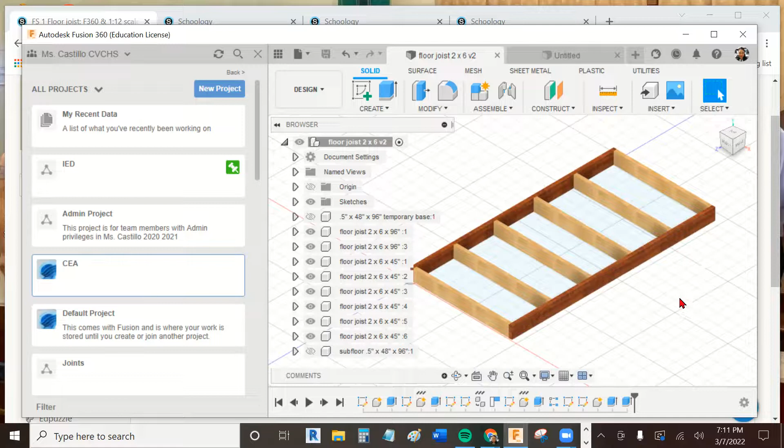With the title block, okay. So if you haven't already, go ahead and click on new project and create a new project, rename it CEA, and then double click on it. Then inside this new project, go ahead and create a new folder, and rename it Food Shack.

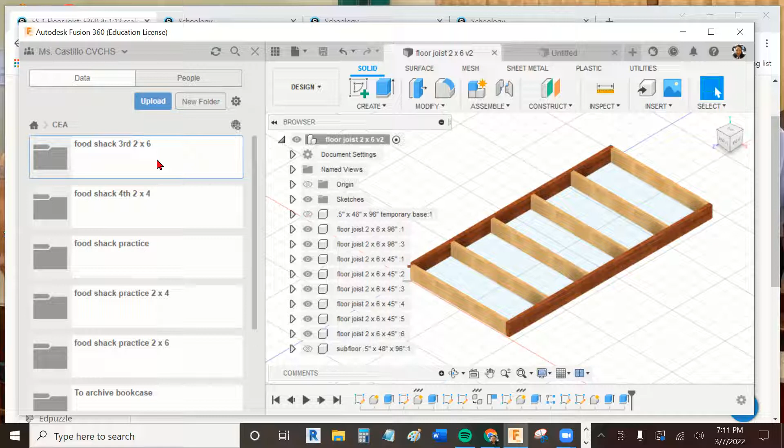Now for third period, you're going to be 2x6. Fourth period, we're going to do 2x4. But in any case, double click in the folder, name it Food Shack folder. Okay, this one is for third period. So you should have an untitled file like this.

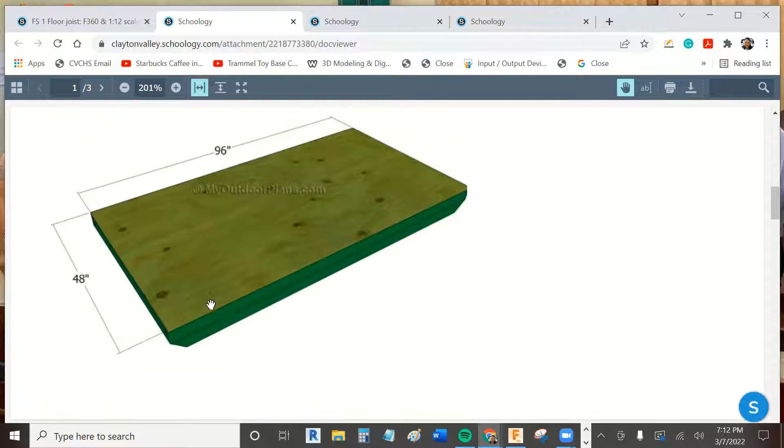So in one of the handouts, we're going to go ahead and start with the floor joist, which is this one right here. It's going to be 48 by 96. And instead of 1, 2, 3, 4, 5, 6, 7 of these horizontal components, we're going to do 6. So it's going to be just a little bit different.

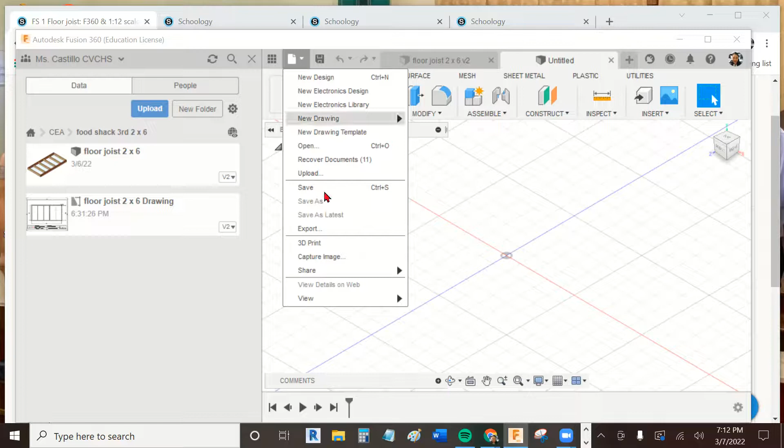Okay, go ahead, open up Fusion, and I'm going to go ahead and name this file. Go ahead and name your file floor joist. I'm going to name this third period 2x6.

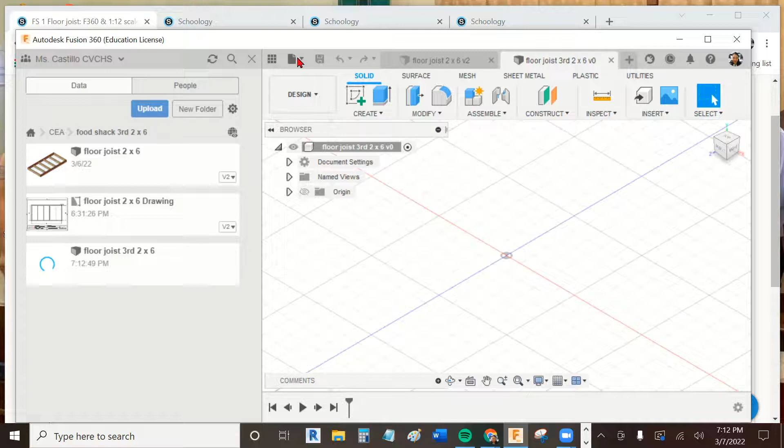Okay, so again, we're going to be looking at this as a reference, 48 by 96. So what I'm going to do on Fusion 360 is close this data panel so you can see we have more room here.

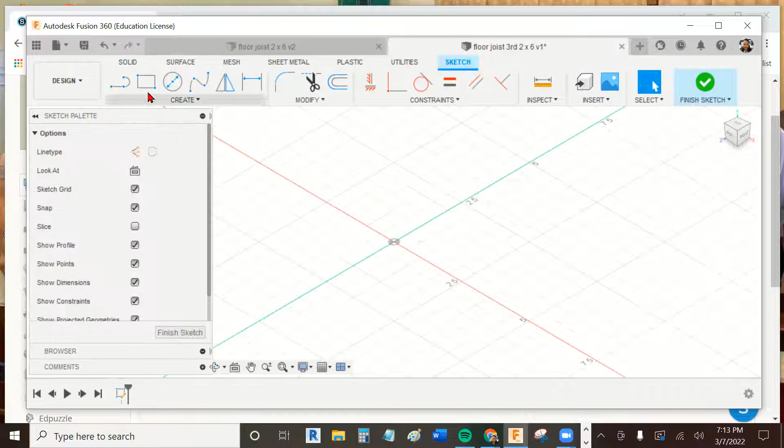I'm going to click on new sketch, click on the bottom plane, click on 2-point rectangle. And again, I always start at the origin and then go out. 96 inches, hit the tab button, and 48. So that's my sketch there. I'm going to click on finish sketch. Okay, zooming in.

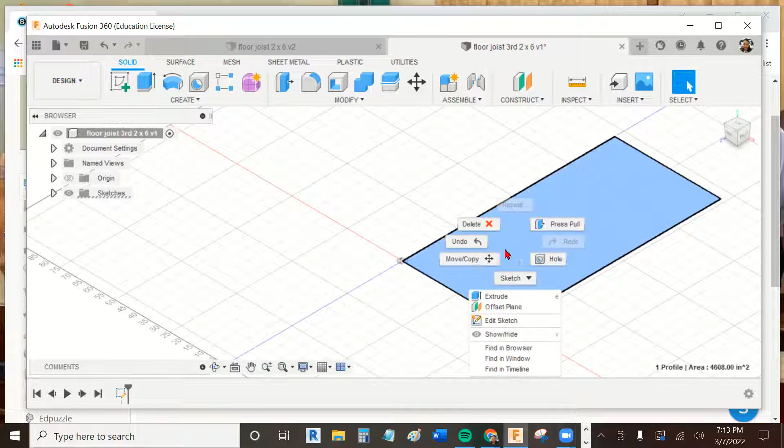And then I'm going to right click inside the sketch and click on extrude. I'm going to go up. This is going to be 0.5 inches.

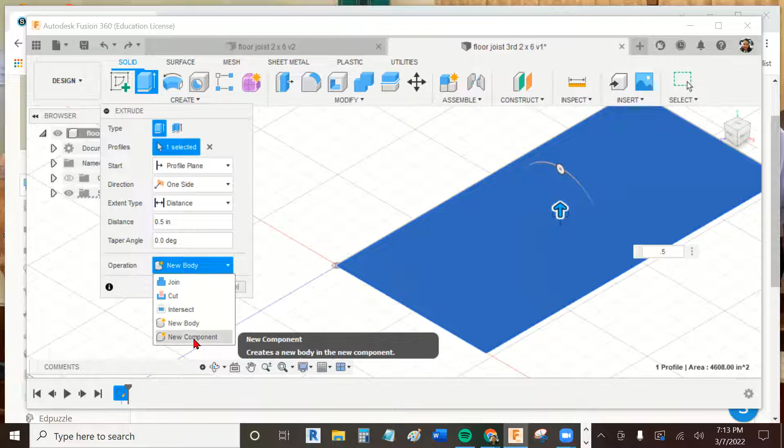Okay, so now let me do that again. With a sketch, I forgot to show you, in the sketch I right click, extrude, and make this 0.5 inches. But before I hit OK, I'm going to make sure that the operation is new component. See how I have join, cut, intersect, new body -- we're going to hit new component because this is going to be our first new component. So I should have component 1 right here.

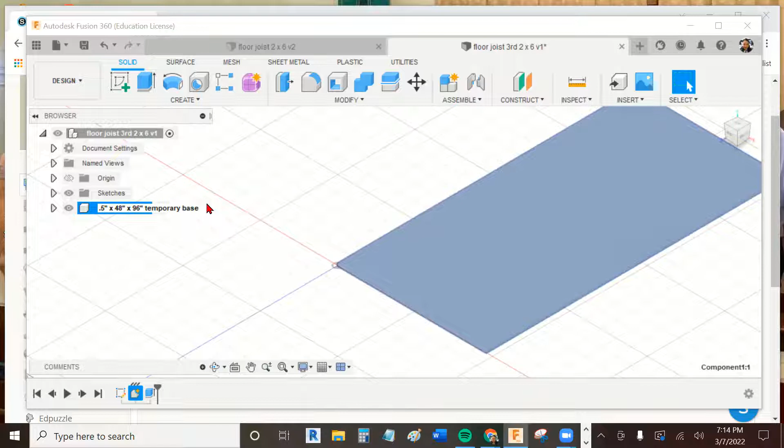So I'm going to double click inside, and go ahead and name this 0.5 inches by 48 inches by 96 inches. And I'm going to go ahead and name this temporary base, just so we can have something to start, because this isn't really part of the floor joist, just so we have something to draw against. So that's our first component.

Now we're going to make it smaller. So now we're going to draw on this 48 by 96. We're going to draw this first right here -- the 2 floor joist sides, the 96 inches and 96 inches, just like that. So here I'm going to click on the front plane.

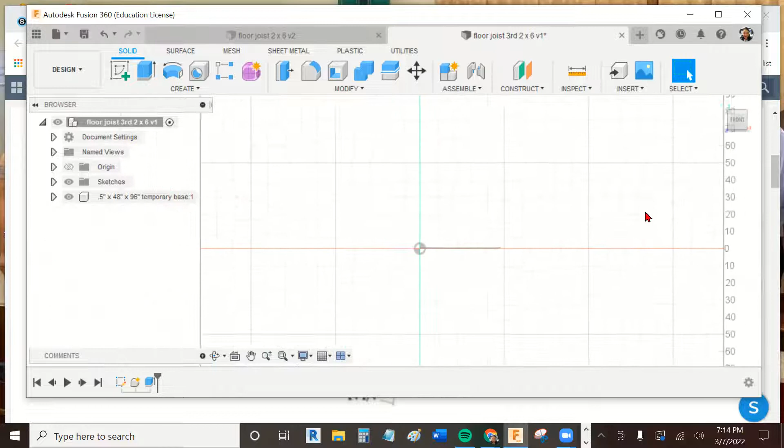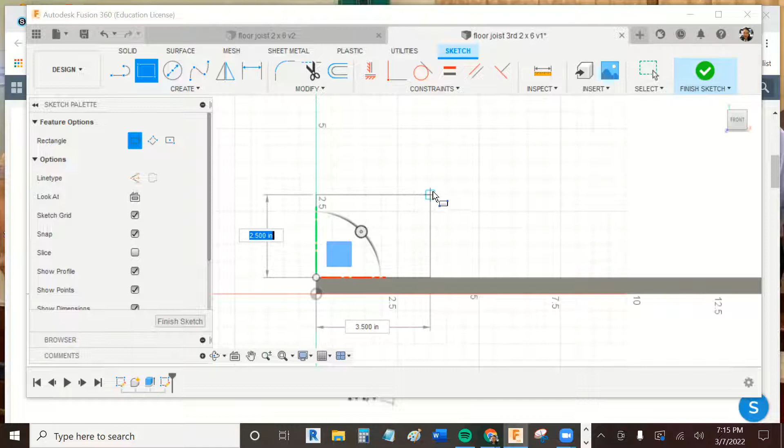And I'm going to zoom right in because I want to make sure I get the corner correctly. So I'm going to click on create sketch, click on that plane, great. Click on 2-point rectangle and then zoom in, right, make sure I got this corner. I want this corner, inside corner right there. Then I'm going to go diagonal. Since we're using 2x6 boards, 2x6 is really 1.5 by 5.5.

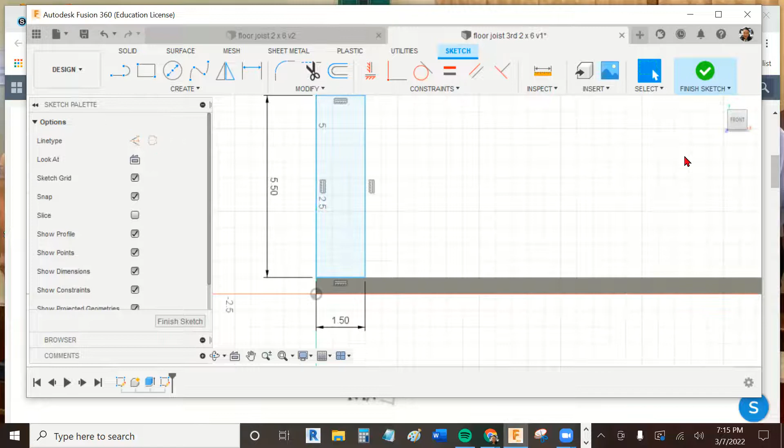So here for the length, we're going to type in 5.5 by 1.5, okay, see that? Then I'm going to hit finish sketch, click on the home button, and then we're going to extrude out all the way out to 96 inches.

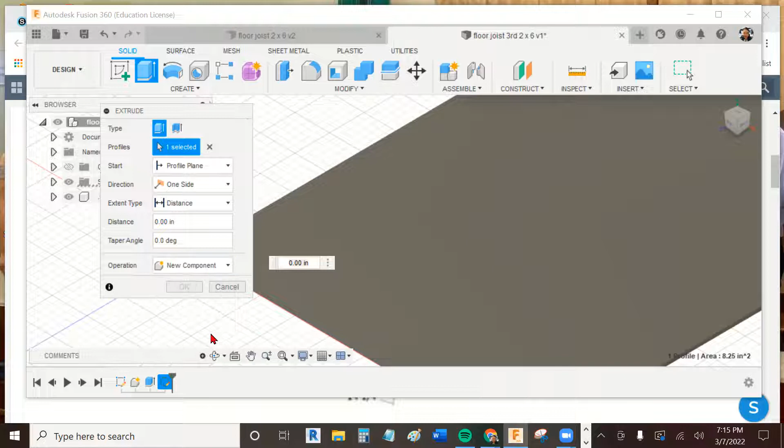So I'm going to right click inside the sketch, and then click on extrude. And then again, make sure you change the operation to new component, and then which direction we're going -- so we're going this way, so that's going to be negative 96. Remember, operation new component, hit OK.

Okay, just like that. Let's see how that looks from the top. Okay, perfect, see how it matches? I just want to make sure that it's exactly 96 inches. From here it kind of didn't look like it.

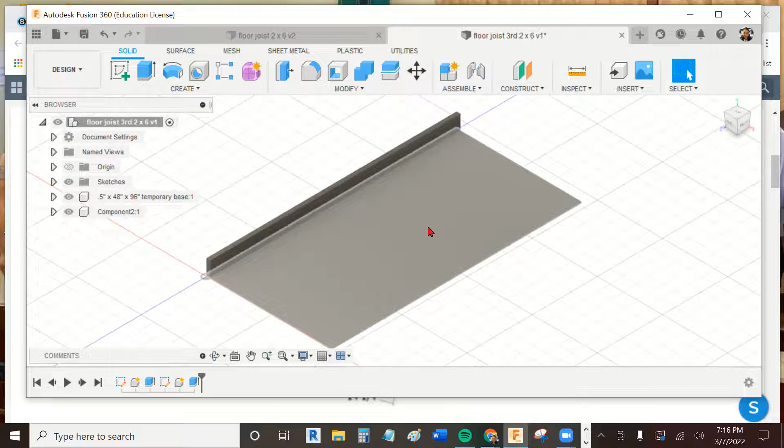So I'm going to click on this component, double click. I'm going to go ahead and change the name again as we go. So this is going to be a 2x6, okay, which is the actual -- I'm not going to put the quotation marks because it really isn't 2x6. So I'm going to put 2x6 by 96 inches, and I'm going to name this floor joist.

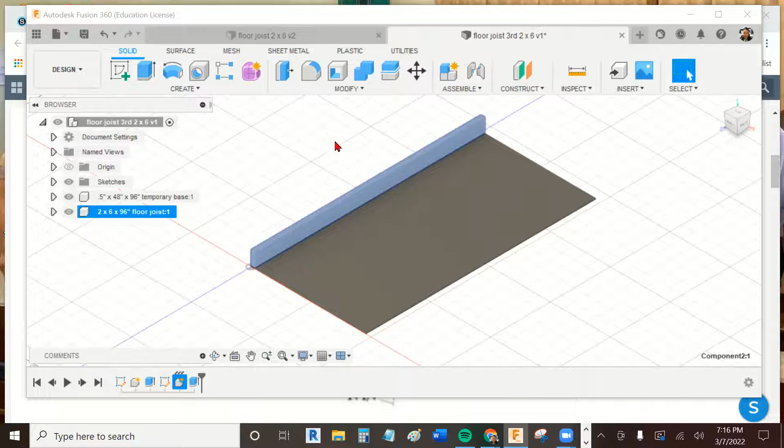It's like that, okay, enter. Now before I continue, I'm going to click on modify. I have this highlighted, click on modify. I'm just going to change the physical material so we can see the contrast in colors, and you'll understand in a second. I'm going to pick cherry right there.

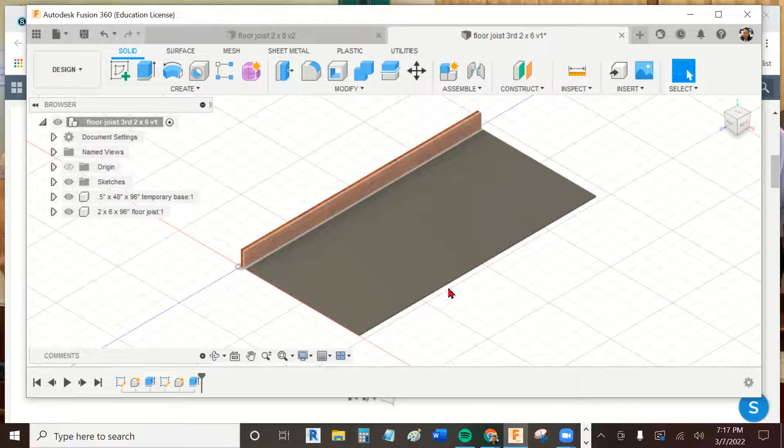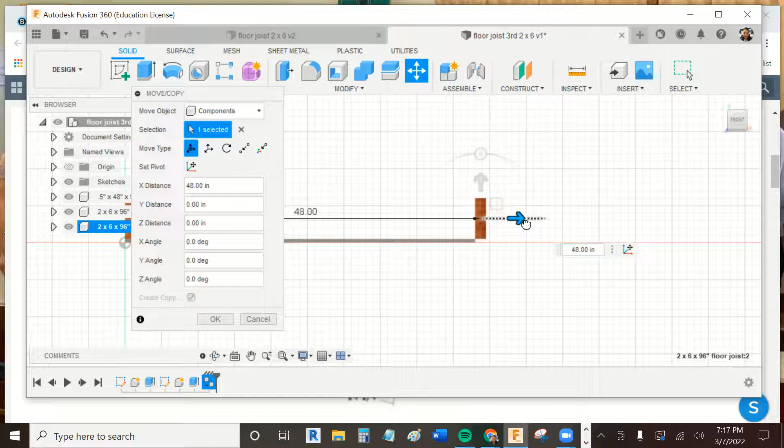Now I'm going to use the move copy tool to create the right side of joist here. Click on this floor joist, click the move copy icon, check create copy, then grab the arrow. Let me move this over, making sure it goes exactly on that corner. If I go this way, 48 is too far, 46 is not far enough. Let's see what 47 looks like. 47 is too far. I think it's 46.5 - there you go, 46.5, hit enter, okay.

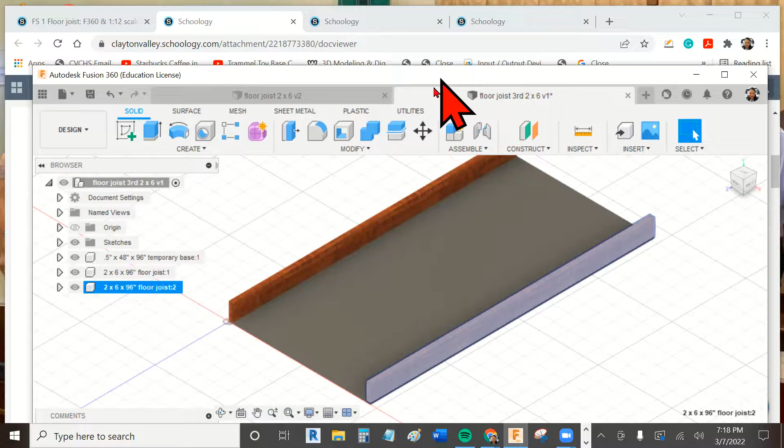So now I have my two 96-inch panels for the floor joist, okay. Now we're going to add, we did the horizontal panels, now we're going to do the vertical ones here, okay.

On here, I'm going to click on the front again. Oh, looked like it was too far over. So I'm going to place it right here, right on the inside corner, this whole length, which I believe is about 45 inches, okay. So I'm going to go create, sketch, okay.

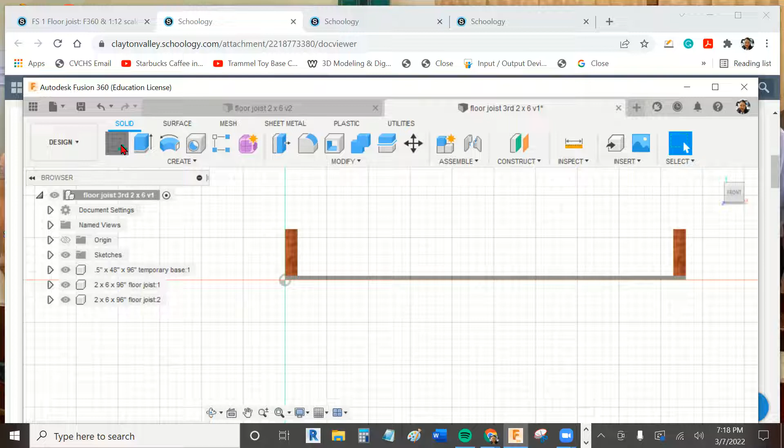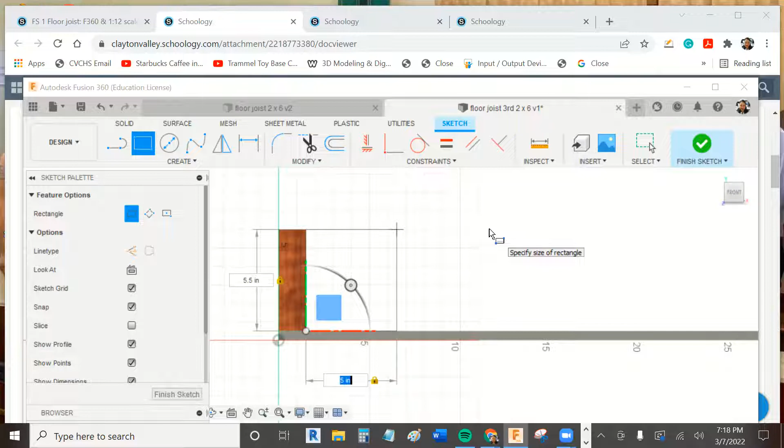Click on this plane, okay, and then I'm going to click on 2-point rectangle. Again, zooming in because I want this inside corner. Then I'm going to go up the same distance, which should be - I'm going to hit tab - 5.5 up here and over here. Zoom in, click, okay.

So I want this distance to be 45. Is that right? 46, okay, 46 is too big. See that 46 is too big? So I believe it's 45 inches. Okay, hit finish sketch. Here's a home view.

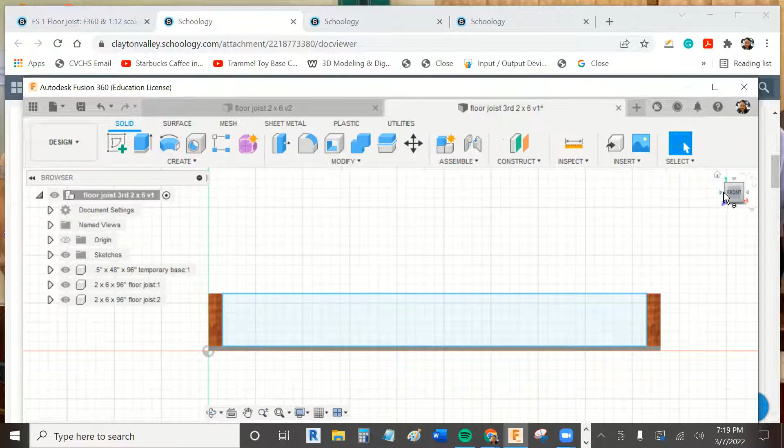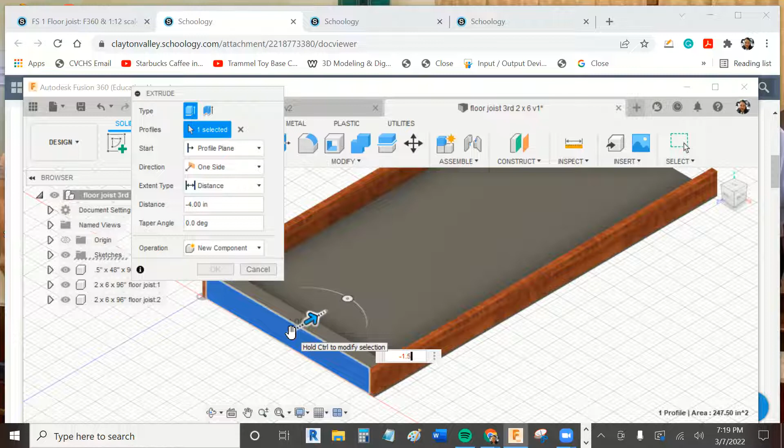Now I'm going to extrude that 1.5 inches. I'm going to left click on here, then right click, extrude. And again, make sure that you click new component as the operation, because we're going to go this way. So if I'm going this way, it's going to be negative 1.5. Okay, see that? So we have the one short joist over here.

Okay, so I'm going to go ahead. All right, I'm going to rename this 2x6 by 45 inches, still the floor joist.

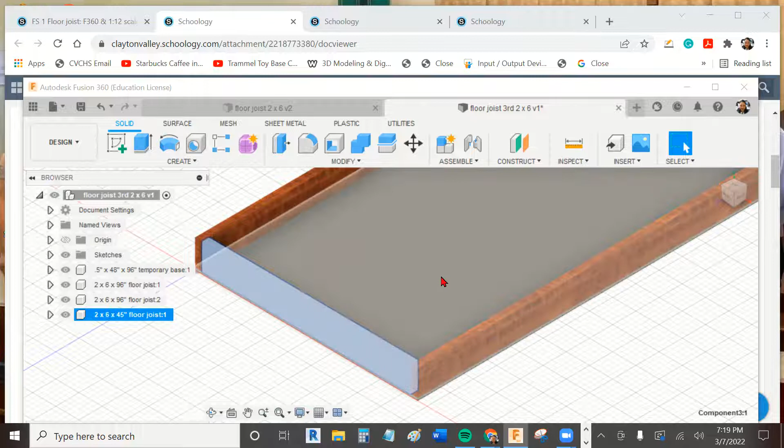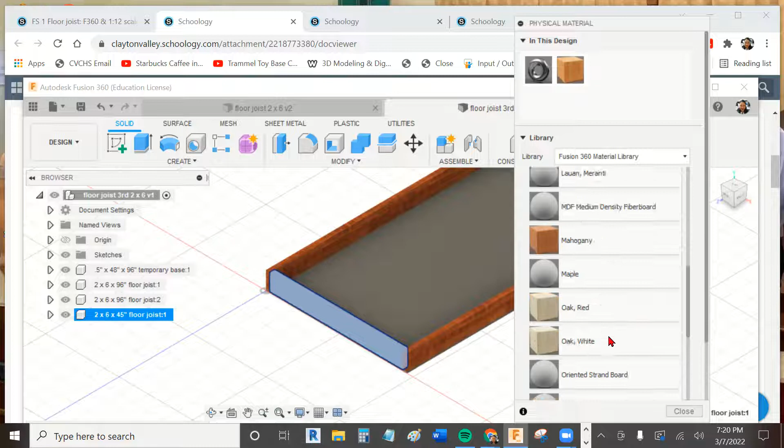Okay, so now we're going to add 5 more copies of this, but this time instead of using the move copy tool, I'm going to use the pattern tool. But wait, let me click on here again - I'm going to change the physical properties and make it pine. So I'm going to modify, click on physical materials, and let's make this pine. It's a little bit lighter, so that way you can see the contrast and colors.

All right, if I click on the home, the front tab, I want to make sure that it lines up correctly, that it doesn't go too far or there's no gaps, right? If I zoom in all the way, there's no gaps here, right? Okay.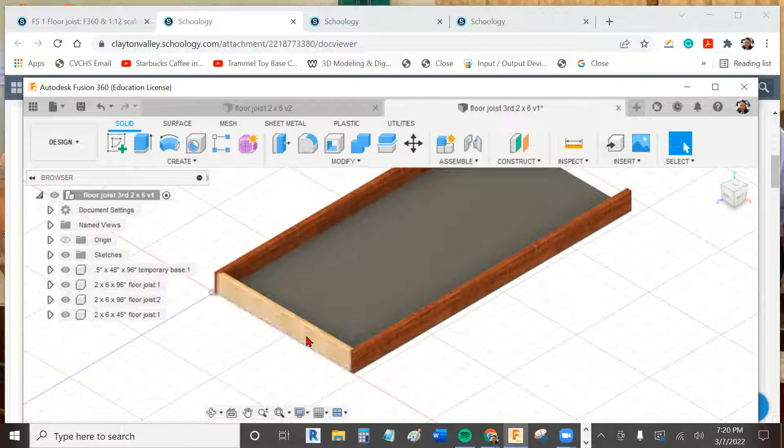Okay, so now I'm going to add 5 more of these boards, 45-inch boards all the way across. This time I'm going to create - I'm going to click on pattern, rectangular pattern, just like we did with the bookcase. I'm going to click on suppress, and then make sure you click on components. It's asking what object you want to select - I'm going to select this object.

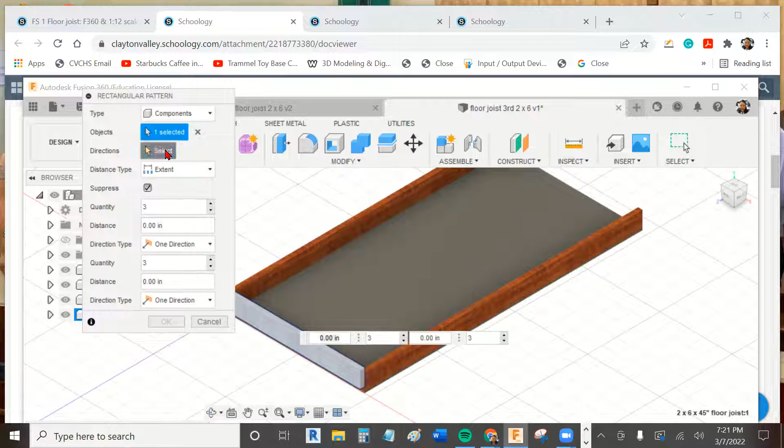Which direction do you want to go? I'm going to go this direction. And then how many do I want? We're going to do 6, right, so I'm going to type in 6, and then click this arrow, and I should have 5 more show up, right?

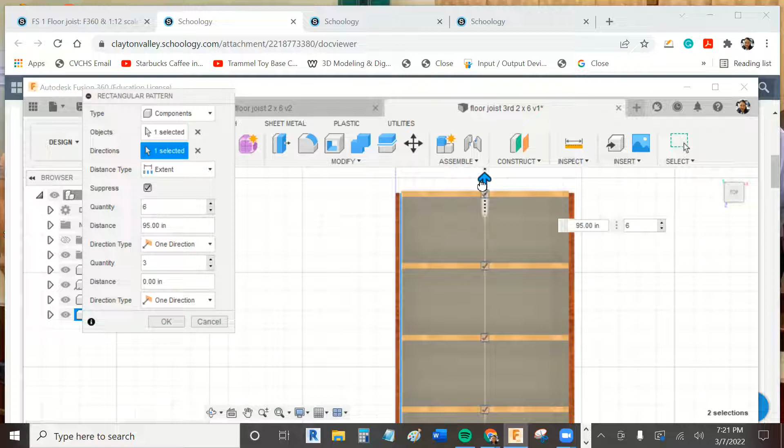So let's go up here, let me click on the top view. I want to make sure - if I go here, 95 is too far. See how 95 is just a little too far? I believe it's 94.5 - there you go, 94.5. Hit okay, all right.

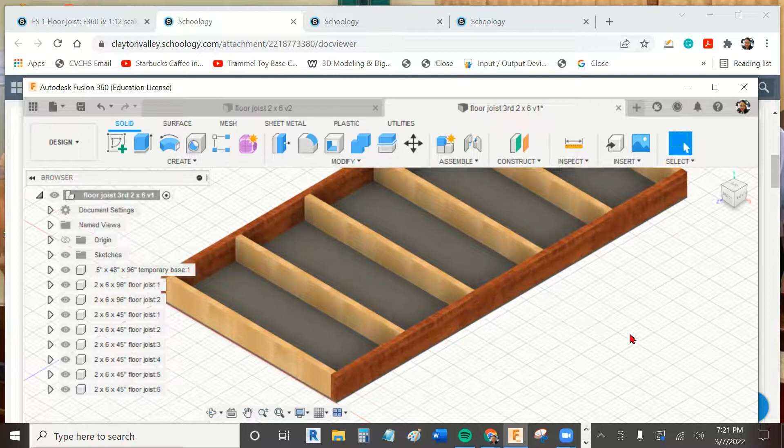So that's our floor joist, okay. See that? So if you look at it, it should be flush on every side - you shouldn't see anything sticking out. If you look, this is our temporary base, okay, it should look nice and even on all sides.

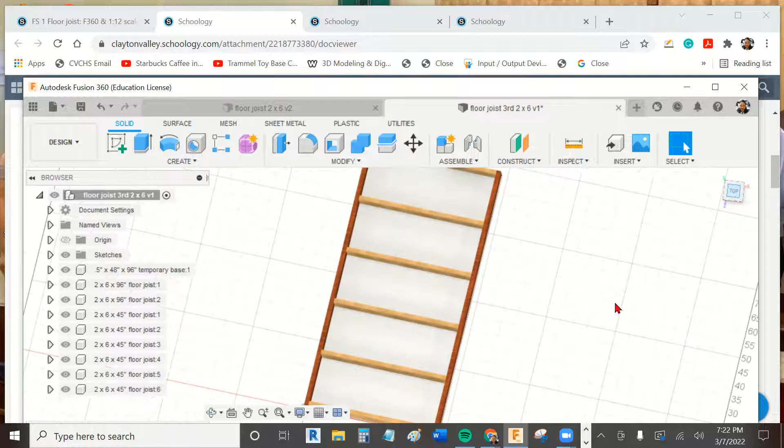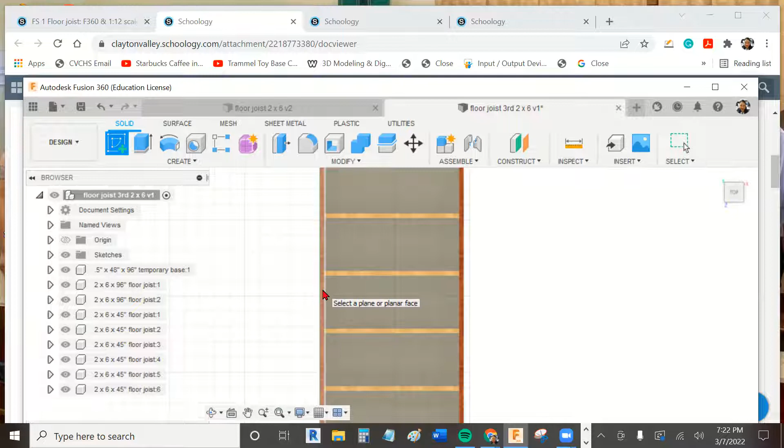Now we can do the drawing now, let's go ahead and do the subfloor, because there's going to be a floor that goes on top of this, okay. So I'm going to click on the top view, and I'm going to go create, sketch. I'm going to click on this one of these boards here - any one of these boards will be fine, but I'm going to click on this board. And then I'm going to click on 2-point rectangle, and let's go in closer because I want to hit this corner. We're going to do 48 by 96 again, right, go all the way up across.

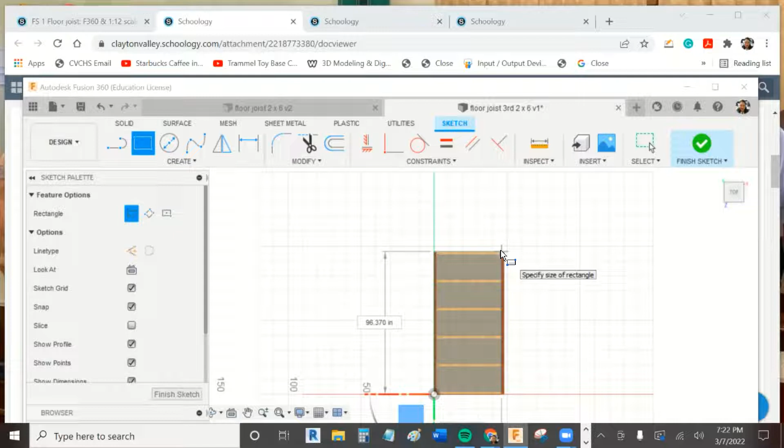Okay, this needs to be 96, right? This number here, tab 96. And then if I hit tab again, it should be 48 down here, 48 by 96. See that? I'm going to hit finish sketch.

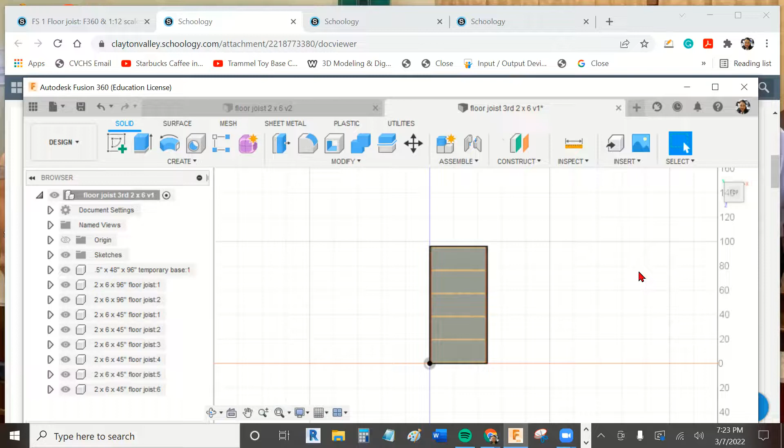Okay, click on the top view. Now click, I'm going to click on here. It's just a sketch, right? Can't really see it until you left click on it. Then I'm going to right click, and then extrude. Make sure you click on new component. We're going to extrude.

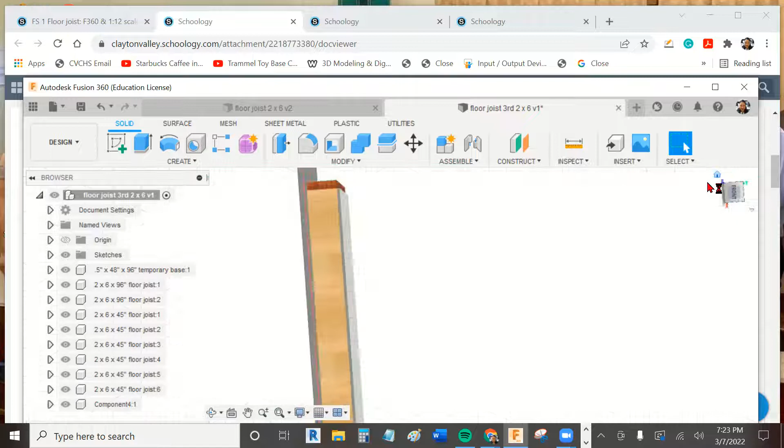0.5, okay, as the subfloor. See that? It should cover it. So if I look at it from the top, oh, that doesn't look right. Right, see how it's sticking up? Get this way. See, it looks like it's not. I need to move it over.

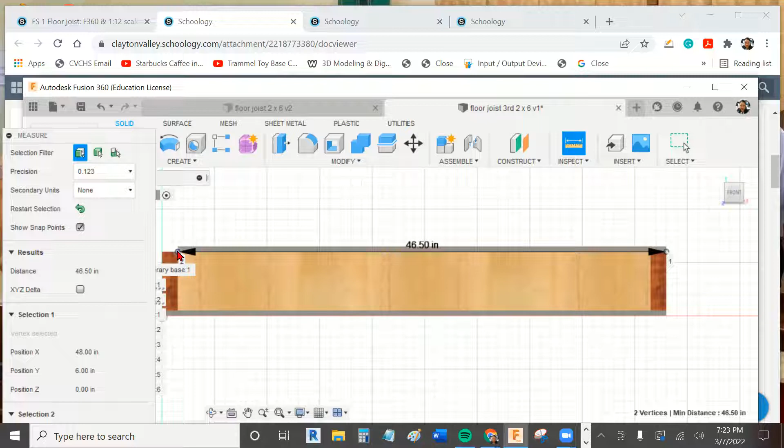Right, let's measure it. Inspect, measure. From this corner, goes over to this corner. 46. Oh, see, it's supposed to be 48. Okay, so I'm missing an inch and a half, so I can fix that really quick.

Okay, so I'm going to click on the home view. Actually, let me turn it around. Let's see. Turning it around, right? See how it doesn't cover all the way. I'm going to click on this face right here.

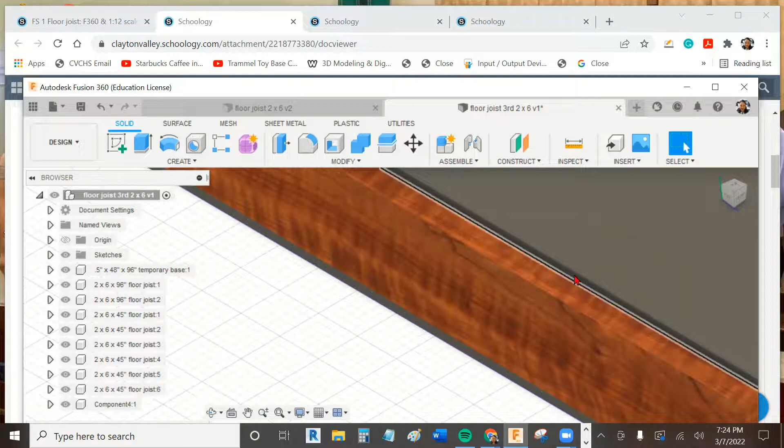I'm going to extrude 1.5. There we go. All right, so now it should fit. Okay, there you go. See that? So now it looks okay.

So now I'm going to double click on here. So this is going to be 0.5 inches by 48, just like our temporary base, okay? 0.5 inches by 48 inches by 96 inches. This is going to be called the subfloor. Okay. All right, see that?

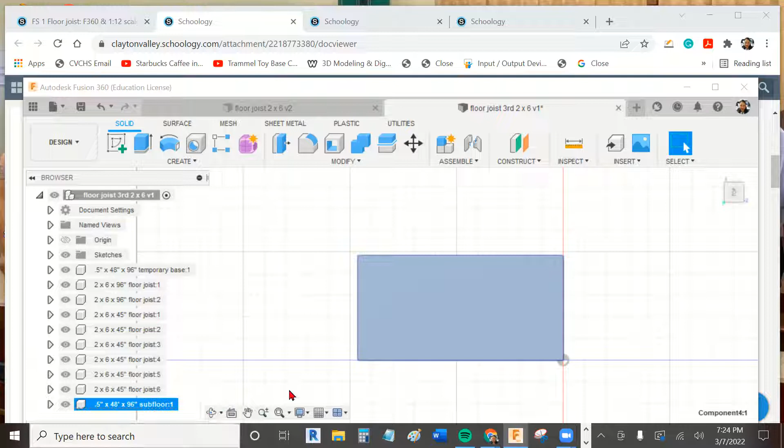So you can't really see it. You can't see the joist underneath. So what I'm going to do, now we're going to do the drawing, is turn the visibility off. I'm just going to click on the eye, right? You click on the eye, it disappears, but it's just hidden. So go ahead and turn off the visibility, but we know it's there.

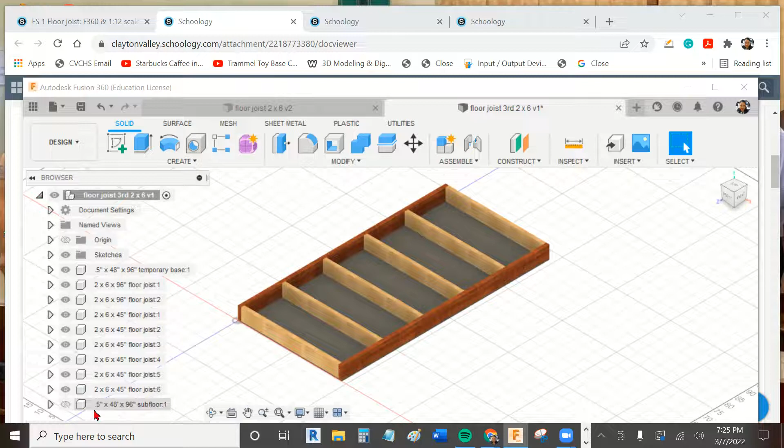Okay, this is for the subfloor, because we're going to do the drawing next. And then you can turn the visibility off of the temporary base too, because we're going to do the drawing just based on this floor joist. So go ahead and save it if you have it already. Name this as floor joist.

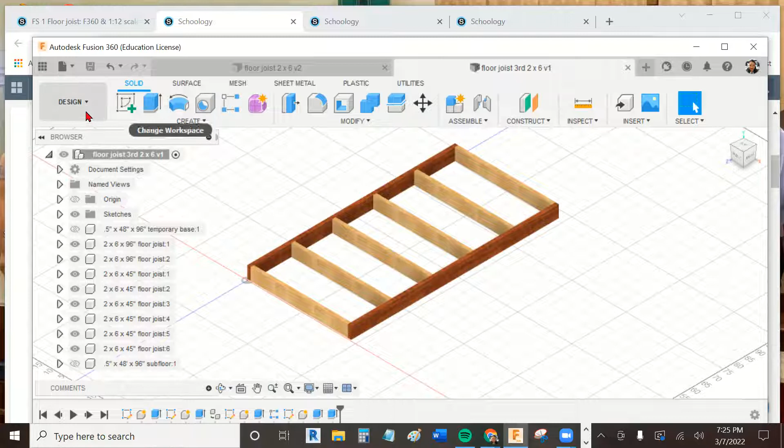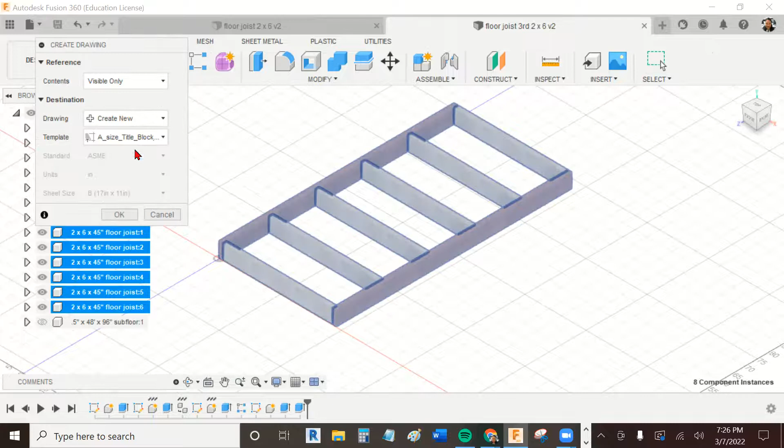Now I'm going to go design, drawing from design, okay? And then if you haven't, you can choose the A-size title block template, CEA, hit okay. Wait for that to process. Okay, let me do that again. Design, drawing from design, A-size title block, the CEA, hit okay. Let that process.

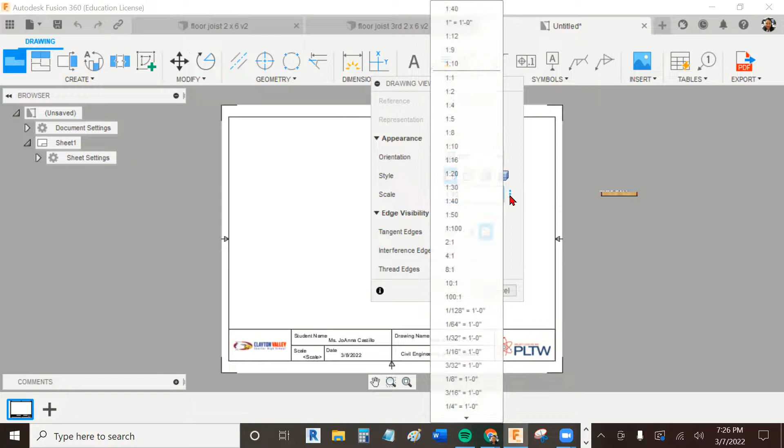Okay, so what you want to do is here with the drawing view window, before you click on anything, click the orientation to the top. Change the style, you can leave it like this, visible edges, or which is the wireframe. And then change the scale from the default to 1 to 40, change it to 1 inch to 1 foot. Okay, and there it is right there.

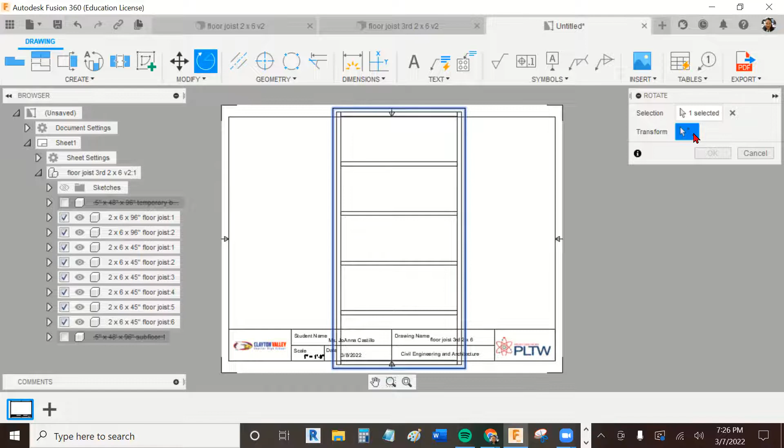And just hit OK. All right. If it doesn't move, there it goes. Hit OK. And then, all right, it's not fitting vertically. So I'm going to go ahead and click the modify tool right here where it says rotate. Click on it. And then I'm going to click the rotate icon right here.

Right, and then, oops, let's do that again. Yeah, let's go like this. Okay, hit OK. And then I'm going to move it, kind of center it. Okay, so now what you're going to do, okay, this edge will disappear. For some reason it shows, but I know that once we're done dimensioning, that this disappears.

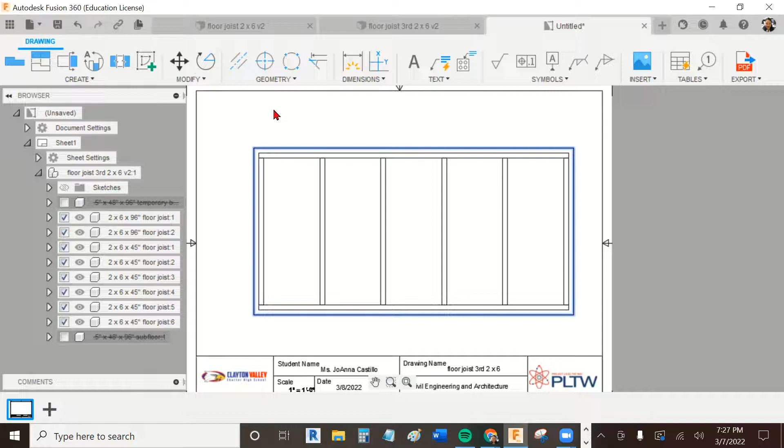I wish it was gone now. Okay, so what you're going to do is dimension it, and then we'll print this out. So, there goes my mouse. Okay, so I'm going to, oh, here you go. Dimension, linear dimension. Okay, and I'm going to grab the outside corners, right?

I'm going to make sure that this says 96. Click on this corner, click on the outside corner. There you go, 96 inches. And then I'm going to click on this outside corner, this side corner. That should say 48.

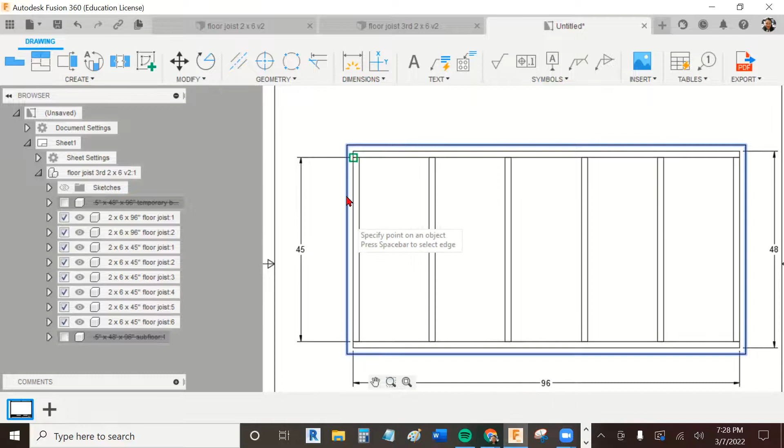Perfect. And then here, okay, I want to make sure this is 45 because I want to see that, you show it to me. Click on this corner here, this corner here. Whoop. Should say 45. See that? Okay, and then also, because 1.5 plus 1.5 is 3, plus 45 makes 48 inches.

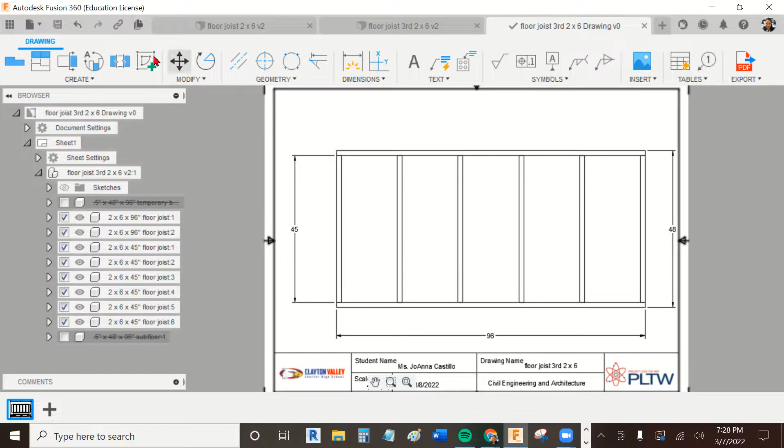Okay, so now what you can do, go ahead and save it, right? It's going to be called floor joist drawing. And then you're going to go file, print. You're going to print it to this printer here, or whatever your computer says. I think it's PRI S4. Print it out and then show it to me.

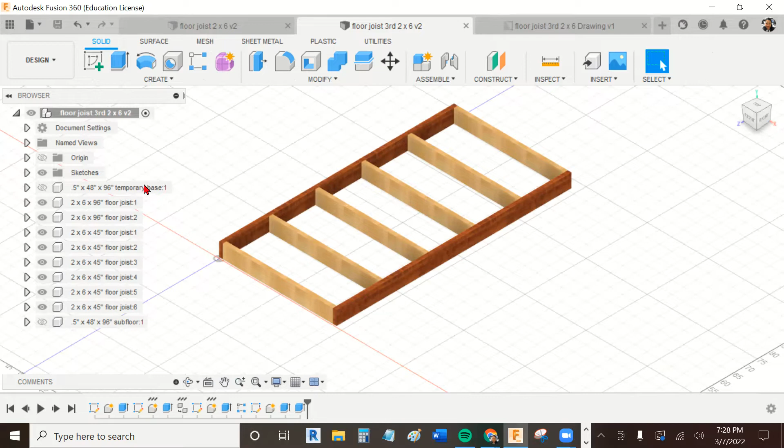Then I will hand you your supplies. Okay, but for now, you're just going to leave this as floor joist, okay, in the data panel. When we continue for the next video, we're going to put the two short walls up. Okay.